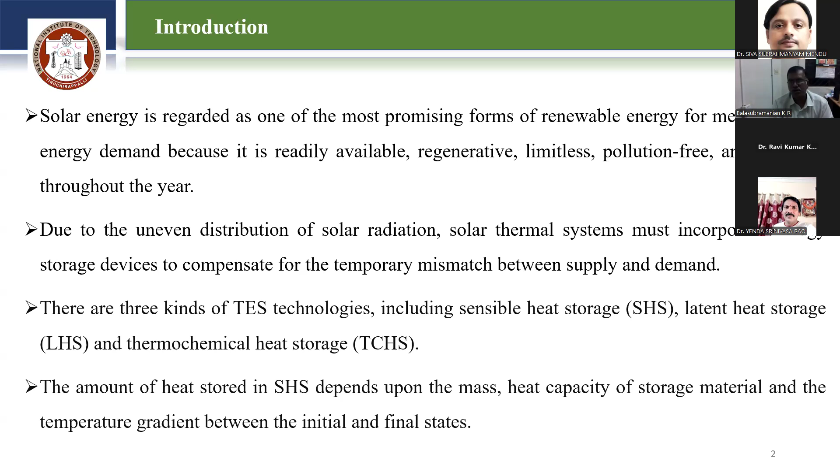So the thing that is very important to consider here is the amount of heat stored. That depends upon factors like the mass and the heat capacity of the storage material, and the temperature difference between the initial and final state. So these things will decide how much heat is being stored. So here we can see the three different types of heat storage.

So in the first figure, we can see the sensible heat storage, where molten salt, sand, rock, concrete, these types of materials are used for storing the heat, working in the sensible heat region.

Then the second one is the latent heat, and here there is a phase change that occurs. That is, solid to liquid phase change occurs. So that is the latent heat storage. And here the PCM materials are being used like salts, metals, the organics. And there are some advantages and some disadvantages among these three that we will discuss in detail.

And the third one is the thermochemical. And here we can see the heat losses are very less in the thermochemical. And also, if we see the energy storage density, it will be very minimal in the sensible heat storage, in between in the latent heat, and more in the thermochemical.

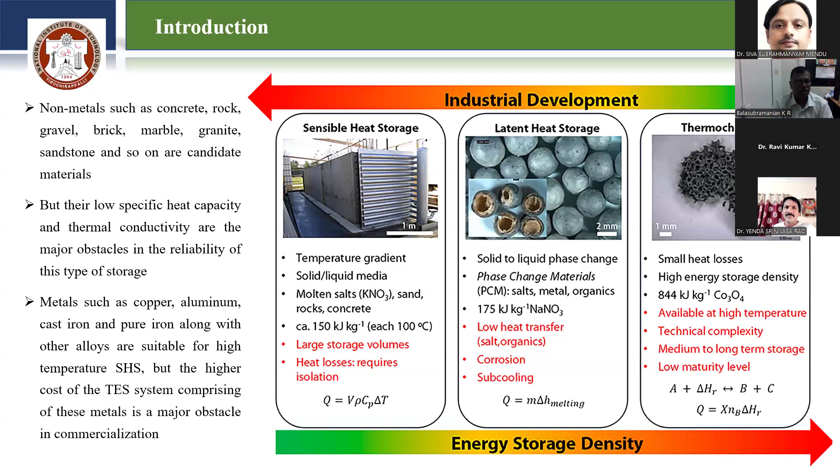And the metals like copper, aluminum, cast iron, pure iron, along with other alloys are suitable for high temperature storage. But cost-wise, it is very high. So that is another problem in making this commercial.

And the third method, that is the chemical thermal energy storage. In this, the energy stored and released is due to the reversible reaction. So here, the chemical methods of TES are classified as sorption storage and thermochemical energy storage. It comprises solid to gas, liquid to gas, or gas phase systems.

So in this chemical TES, the energy is stored in thermochemical heat storage as a result of a dissociation reaction, which is then recovered in a chemically reversible reaction. So here the thermal cycle consists of charging, storing, and discharging.

And here the amount of heat that is stored in thermochemical energy storage involving the solid-gas phase depends upon the pressure of the gas. And it also depends upon the operating temperature and also the reaction enthalpy.

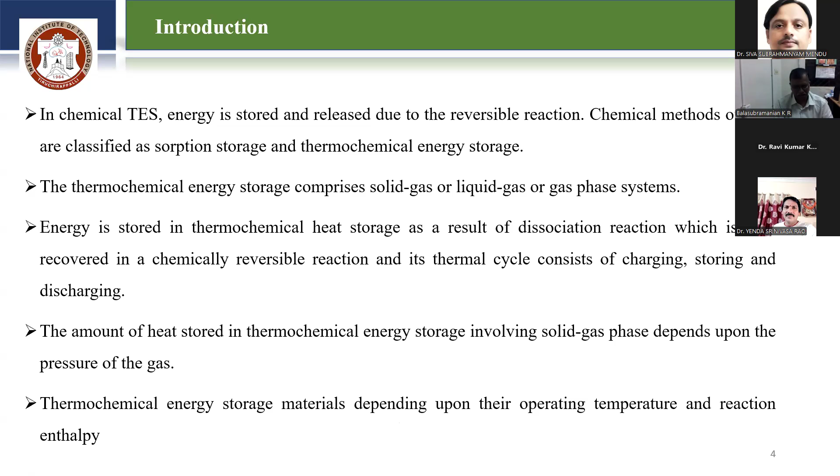So typically the storage density of the latent heat storage medium is higher compared with the sensible heat storage medium, due to the high enthalpy change which occurs during the phase transition. However, the thermochemical energy storage has the highest storage density compared with the other two modes, that is, the latent heat storage as well as the sensible heat storage medium.

But the thermochemical energy storage materials are only in the development phase, and no such system is commercially available. So that is one major thing, but a lot of research is going on. And the commercial viability of the latent heat storage is limited due to the material characteristics, and hence it is in the development phase.

However, this sensible heat storage is commercialized in a large manner. And when we discuss the durability, the sensible heat material lasts almost around 20 years, whereas the latent heat storage material is around 1/4 of that lifetime. And when we compare the thermochemical energy storage, it is about 1/10 of the lifetime of the sensible heat storage material. So the lifetime is very less for the thermochemical energy storage, and similarly for the LHS materials.

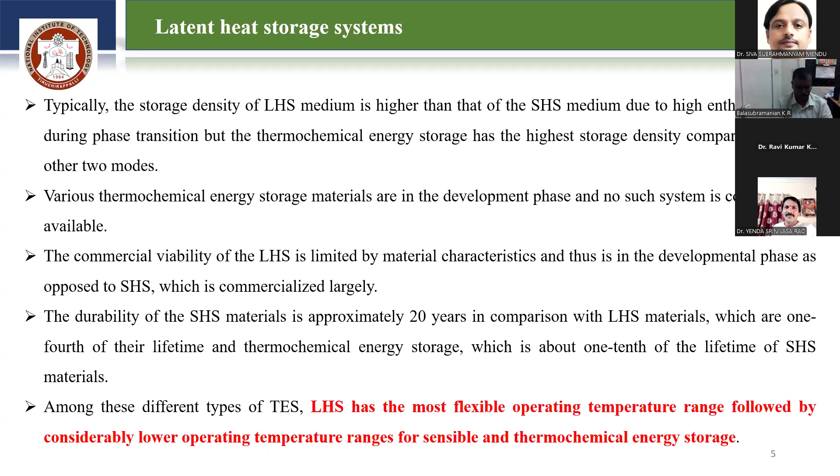So here we can see the classification of the thermal energy storage system. Here we can classify into two basic classifications. One is the physical storage, the other one is the chemical form storage. And the physical storage, once again, can be classified as sensible heat storage and latent heat storage. And sensible heat can be stored in the solid or the liquid form.

In the solid, the candidates are non-metals like rocks, and even metals and alloys are used. And under liquid, the molten salts, water, which is one of the best examples, and thermal oils. So these are all the liquid-based SHS storage mediums. And in LHS, PCMs are majorly used for conversion of solid to gas, solid to liquid, liquid to gas, and

solid to solid. So here we can see the different types of PCMs, like organic PCMs, inorganic PCMs, and eutectic PCMs. The examples of organic PCMs are paraffins, fatty acids, esters, alcohols. So these are all what people are using. And the inorganic PCMs are the salts, salt hydrates, metallic compounds, metal alloys. And the binary, that is the eutectic PCMs.

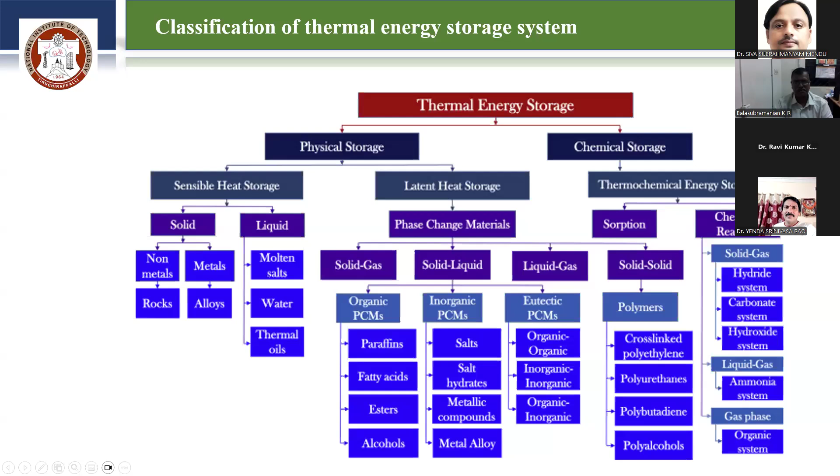So here the heat of phase transition in the solid to solid PCMs is relatively less when we compare to the solid-liquid PCM. So the majority of the PCMs considered for TES are solid to liquid phase transition materials, right? And these are sorted on the basis of the nature of materials, whether organic, inorganic, or eutectic.

And these PCMs are further categorized on the basis of their phase transition temperature as low, medium or intermediate, and high. In the case of low, the melting points will be less than 220 degrees centigrade. In the intermediate, it ranges between 220 to 420 degrees centigrade. And in the high temperature range, it is more than 420 degrees centigrade.

And the organic PCMs, like the paraffin wax, alkanes, esters, fatty acids, alcohols, and even other components, including ketones, amides, sugars, and oleochemical carbonates. So these are all being used. These are all the organic PCMs.

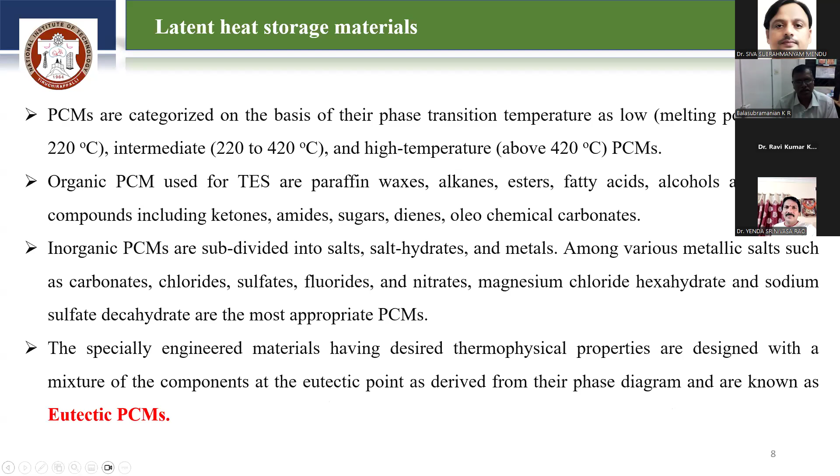The specially engineered materials having desired thermophysical properties are designed with a mixture of components at the eutectic point, which are derived from the phase diagram, and are known as eutectic PCMs, like organic, inorganic. So the eutectic PCMs may consist of a eutectic mixture of multiple materials, like, as I mentioned, mixtures of organic components and inorganic components.

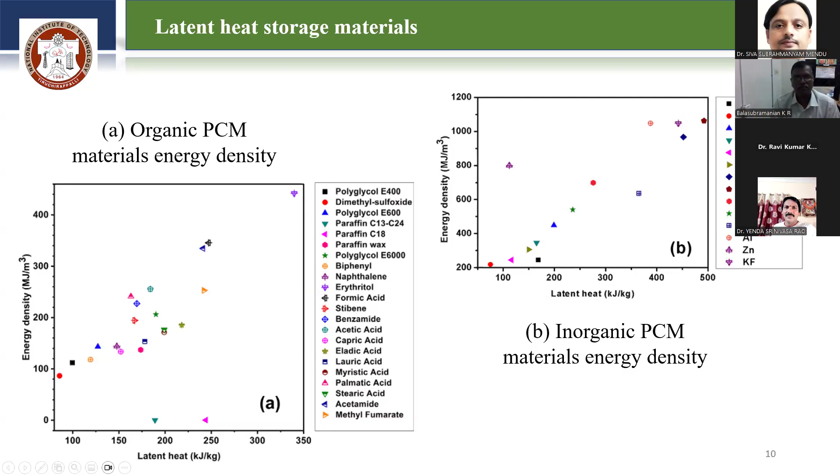Here we can see some advantages and disadvantages of the organic PCM. The advantages: it will freeze without much supercooling or subcooling. That is one major advantage, and it can be incorporated directly. The thermal performance is better, and it is compatible with conventional materials of construction. There is no segregation, it is chemically stable, with high heat of fusion. It is also safe and non-reactive, which is very important, and it is recyclable.

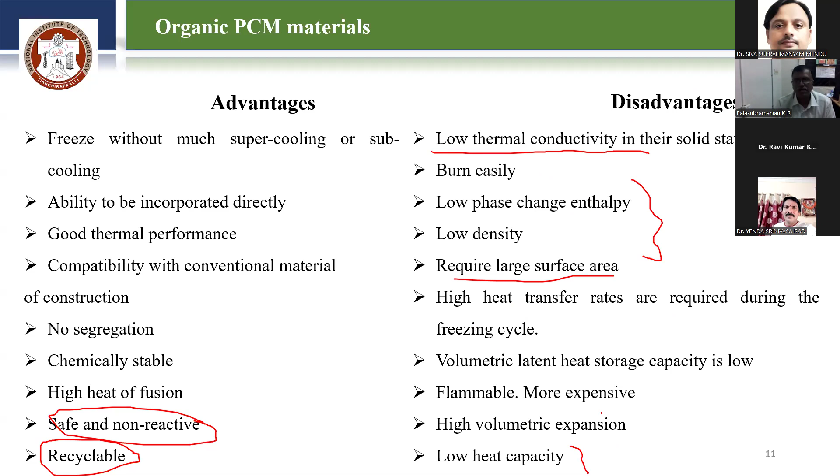Now some disadvantages. The thermal conductivity is very low, and sometimes it will burn easily. The phase change enthalpy and density are low, it needs a large surface area, and high heat transfer rates are required during the freezing cycle. It also has low heat capacity. These are some of the disadvantages of the organic PCM.

Now coming to the inorganic PCM, it possesses high thermal conductivity, large heat storage capacity and lower volumetric expansion, which means it occupies less space, and high heat of fusion per unit volume. It is not that costly compared with other PCM materials. It is also recyclable, and the phase change enthalpy is higher.

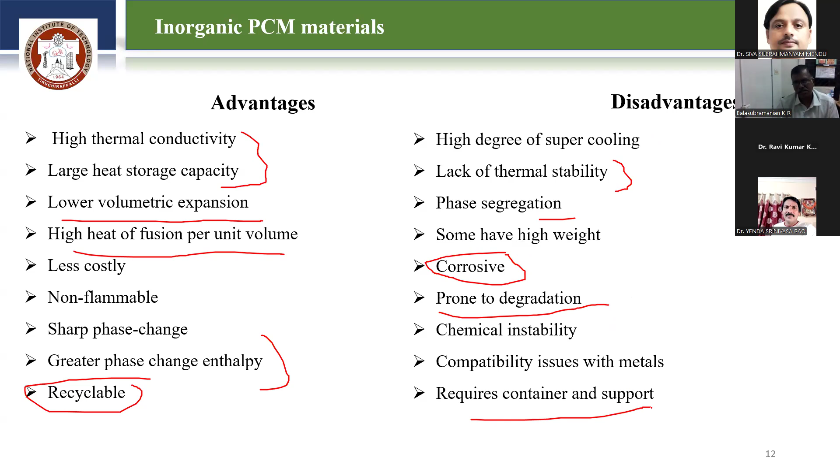The disadvantages of inorganic PCM: it needs a high degree of supercooling, and thermal stability is another big problem. Phase segregation will happen here. Another important thing is corrosiveness. It is also prone to degradation and chemically unstable. It needs a container as well as support. These are the disadvantages of the inorganic PCM.

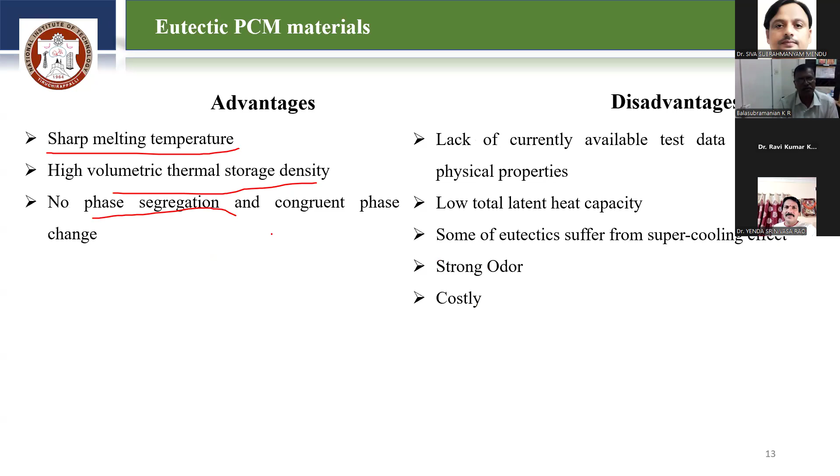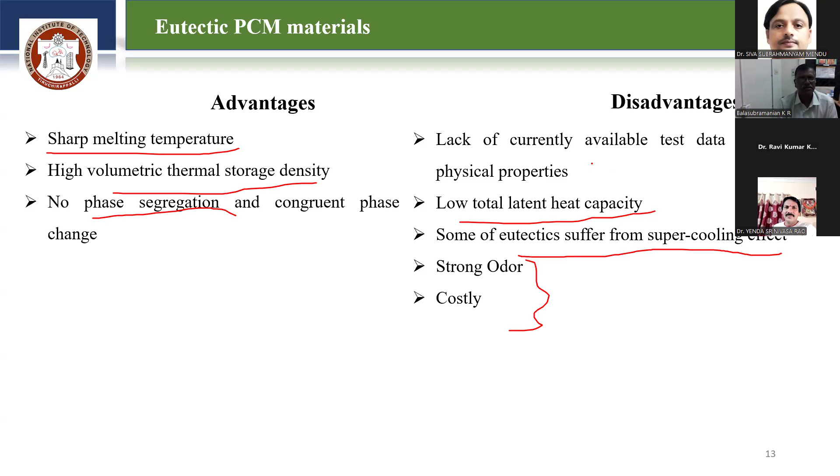Now coming to the eutectic PCM, it has a sharp melting temperature and high volumetric thermal storage density, there won't be any phase segregation, and it has congruent phase change. Some disadvantages: low total heat capacity. Cost-wise, it is very high, some eutectics need a supercooling effect, and test data about the thermophysical properties of these materials is not completely available.

So far we have discussed the different heat storage materials, thermal storage materials. Now let us discuss the thermal conductivity enhancement techniques in phase change materials. Researchers are adopting different methodologies in order to increase the energy storage.

So among that, there are few enhancement techniques available, which we are going to discuss now. One is the fin-based, that is the extended surfaces, then encapsulation of the PCM, addition of nanoparticles in the PCM, then metallic foam. And when we come to the addition of nanoparticles: carbon nanotubes, graphene nanoparticles, silver nanoparticles. So these are all being attempted. And in the case of metallic foam, nickel, copper, graphite foams are being tested.

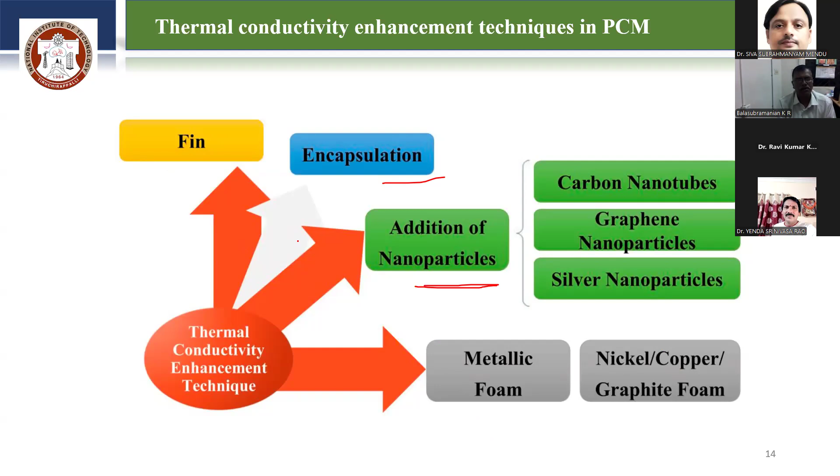So these are all the different thermal conductivity enhancement techniques. Some researchers are using 2 or 3 techniques combinedly to improve the efficiency of the system. So here we can see the different techniques: the addition of nanoparticles like carbon nanotubes, graphene nanoparticles, silver nanoparticles, the metallic foam, nickel foam, copper foam, graphite foam, even the encapsulation. And other materials like hexagonal boron nitride, spongy graphene. So these are all being used.

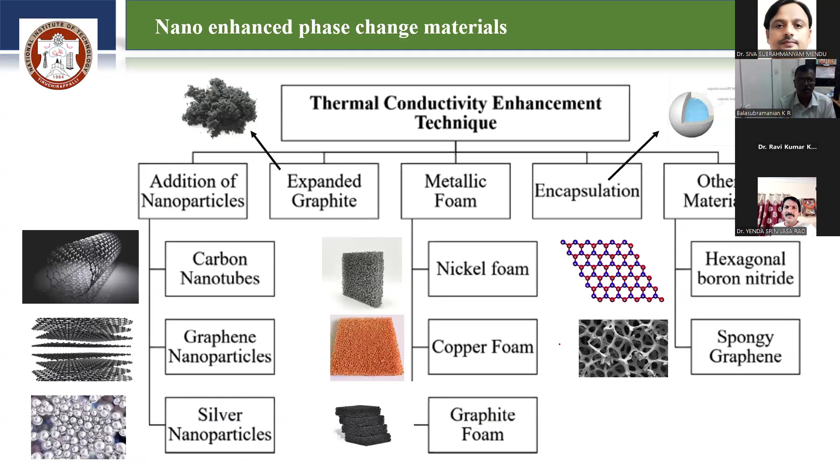Now coming to the thermal management of the lithium ion battery cells. Nowadays, even the automotive industry is moving towards the electric vehicle, in order to reduce the pollution and also to reduce the consumption of fossil fuels like diesel, petrol. The industry is moving towards the e-vehicle. The major problem in the e-vehicle is the battery. So the battery thermal management system is very, very important.

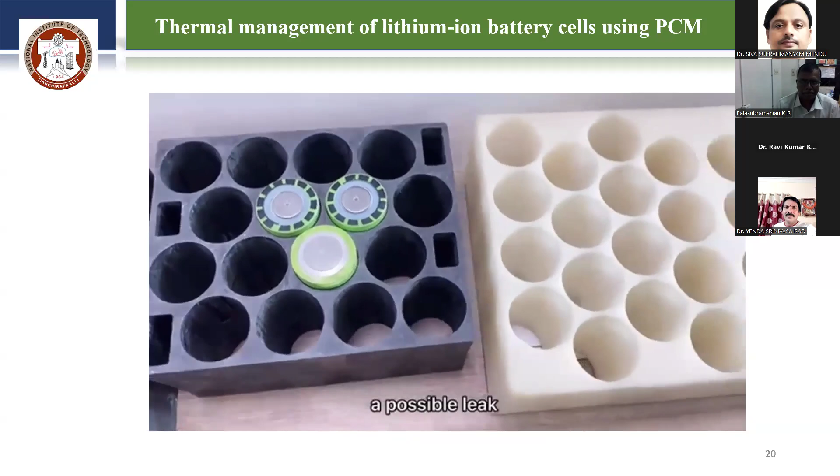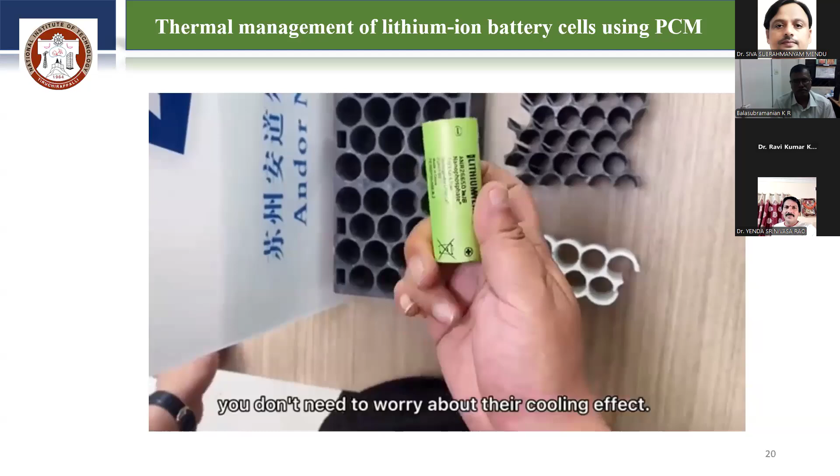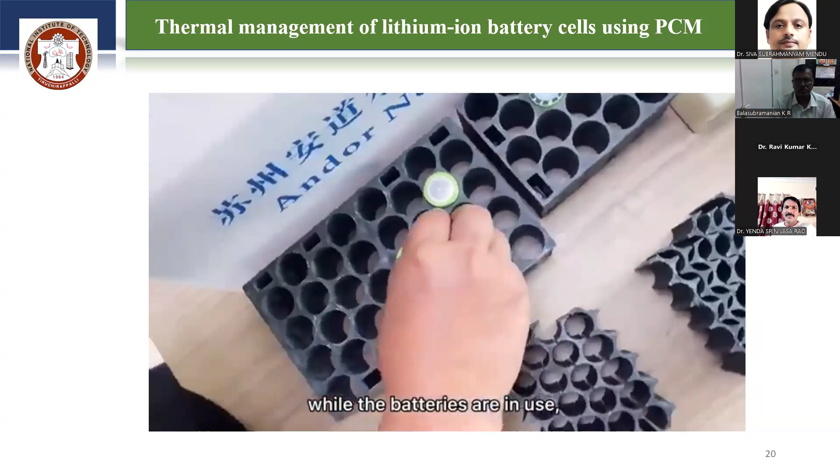For the battery pack usually come with something disturbing. Batteries melt with a possible leak when working under high temperatures. Other products based on PCM and graphite are hard and far from pressure resistant, leading to short circuits with favorable electrical conductivity, which is a fatal flaw. We are glad to introduce our products in detail for you. Through injection process, these soft materials can be easily made into all kinds of shapes to fit any type of batteries. We also specially designed a kind of holder for large battery packs with convenient assembly no matter how large they are. There are two types of products we developed. The white one without graphite and the other one with graphite in it, which conducts heat better. Since graphite is electrically conductive, measures were taken to make the products insulated. Besides, you don't need to worry about their cooling effect. Exposed at an ambient temperature of 85 Celsius degree for 4 hours, our PCM reached 59 Celsius degree, which proves they can control the temperature well while the batteries are in use, ensuring a longer life and a higher security. Our products have passed partial testing of UN 38.3 safety to be concluded. With quantifiable injection molding process, our PCM are able to extend battery life by 40%, safer and difficult to self-combust. All these add up to the biggest advantage of PCM.

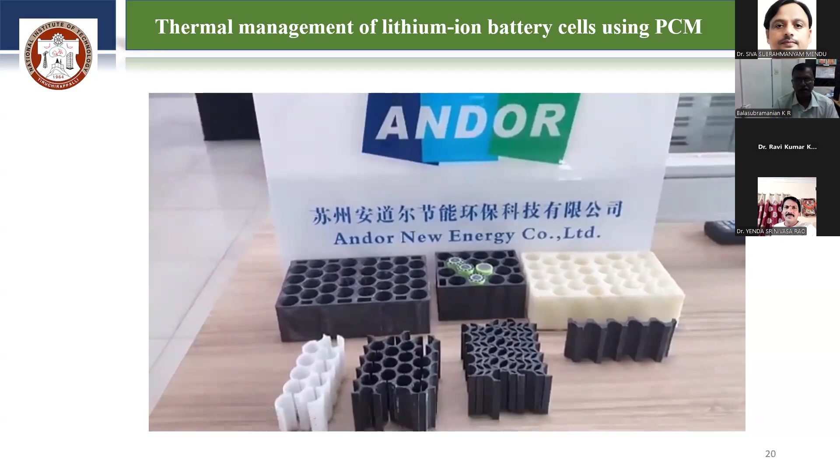So these are the advantages of PCM. So this will effectively maintain the battery temperature.

So passive thermal management of the photovoltaic cell using the PCM also helps in improving the overall efficiency of the system. We know that the photovoltaic system will work effectively at a lower operating temperature. If the temperature rises, the performance of the PV module will go down, right?

And incorporating the PV and the PCM is a novel technology, a PV module and PCM coupled in a single module for the thermal management of silicon-based PV cells, which ultimately improves the reliability of the system.

So here, the PCM is placed in channels under the cells, and during the day, as the temperature increases in the cell, the PCM will capture the heat and it will melt. Then what happens during the night? It transfers the heat to the environment and turns into solid state. But the major problem is the cost of the raw materials.

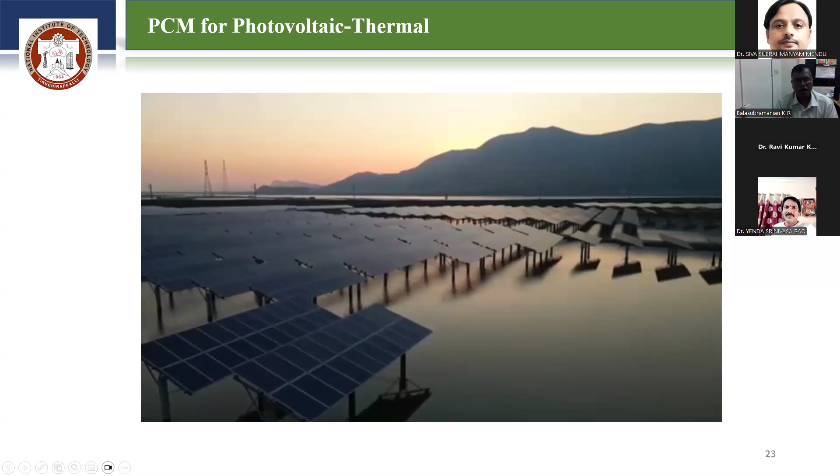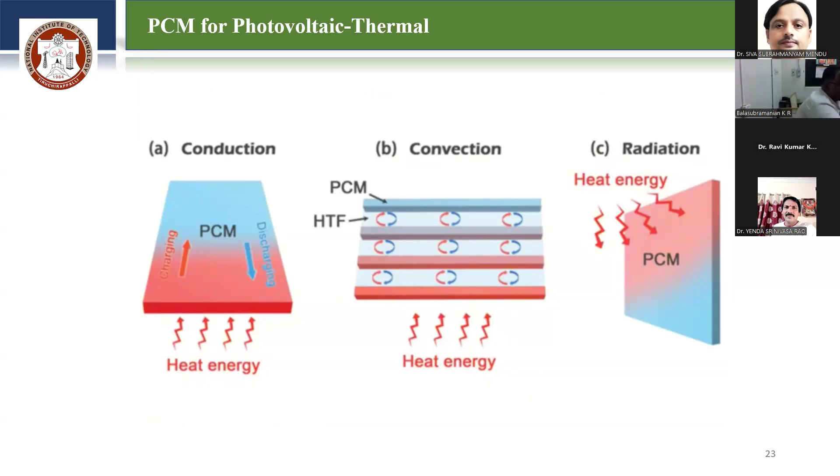So here we can see another: phase change materials cooling is a distinct form of passive conductive cooling. PCMs are substances capable of retaining thermal energy, allowing temperature stabilization. These absorb or release significant quantities of so-called latent heat when they experience a change in their physical state, such as during the melting and freezing cycle. PCMs are listed as organic oil, inorganic salt hydrates, and eutectics. The melting temperature and latent heat are the two elements for the identification of the appropriate PCM.

While this cannot be considered passive cooling in the strict sense, extra effort is not required, and heat is dissipated more conductively and has the effect of retaining the same temperature. As a matter of fact, PCM integrated with the PV module would become a better alternative due to its important properties for daytime heat absorption and nighttime release, such as high latent heat, high absorbing capacity before melting or solidification, constant temperature during phase transition, and slightly higher melting temperature.

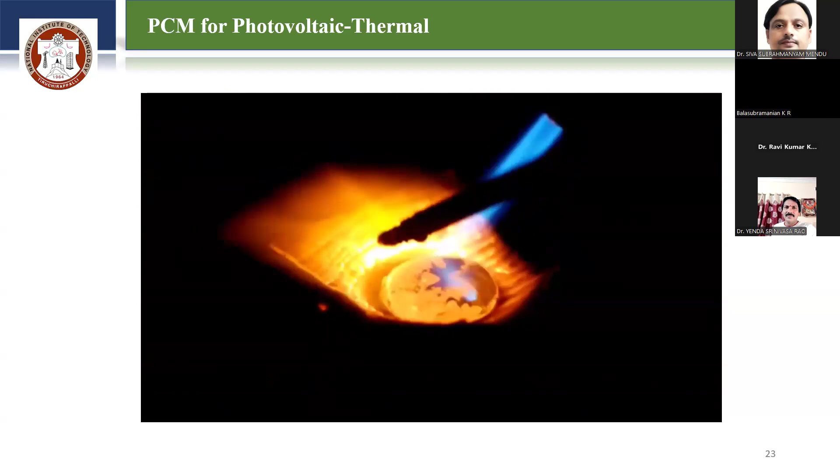Salt-based PCMs, for example, may react with metal, causing corrosion, while paraffin may react with plastics. As far as temperature is concerned, it is essential for the PCM to have a melting point above the ambient temperature at which it operates. A melting point below that will trigger the PCM to liquefy before the panel is even heated, rendering it useless. Organic PCMs, such as paraffin, are widely used for thermal storage systems.

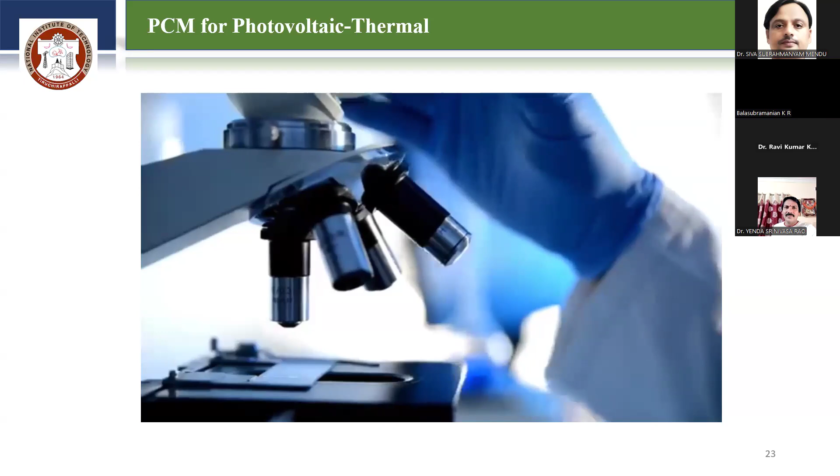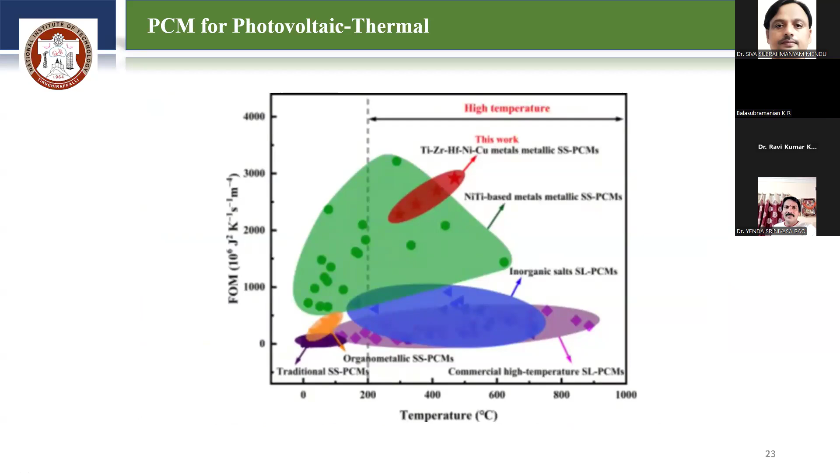However, as per various studies, the structure of organic hydrocarbons has a low thermal conductivity, which reduces the heat charging and discharging rate during the melting and solidification cycles. In contrast, inorganic PCMs have a higher phase change enthalpy, resulting in better thermal properties. A specific PCM, CaCl2·6H2O, MgCl2·6H2O eutectic, can be used for control of temperature and cooling of PV panels.

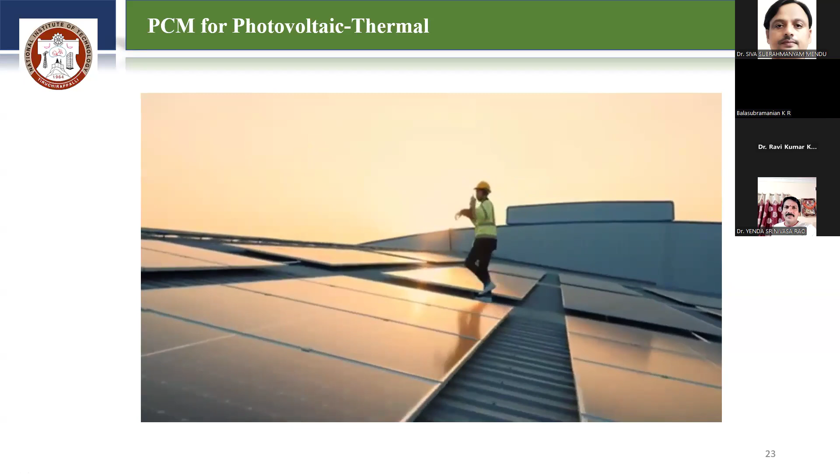So, how to select the PCM for PV panels? Nowadays we know that India is more committed to investing in PV technology and installing solar-based PV power plants. If you see this data, India's solar power installed capacity is around 92 gigawatts. And in order to achieve carbon neutrality by 2070, we need to use solar power as much as possible, and we are committed.

Already in the Paris Agreement, we have committed that emissions will be reduced by 33 to 35 percent. And it will also help in achieving the sustainable development goals of the United Nations. So our government, the Indian government, is actively focusing on the installation of PV-based power plants. And the major thing in this is the maintenance, and maintaining the temperature at an operating level.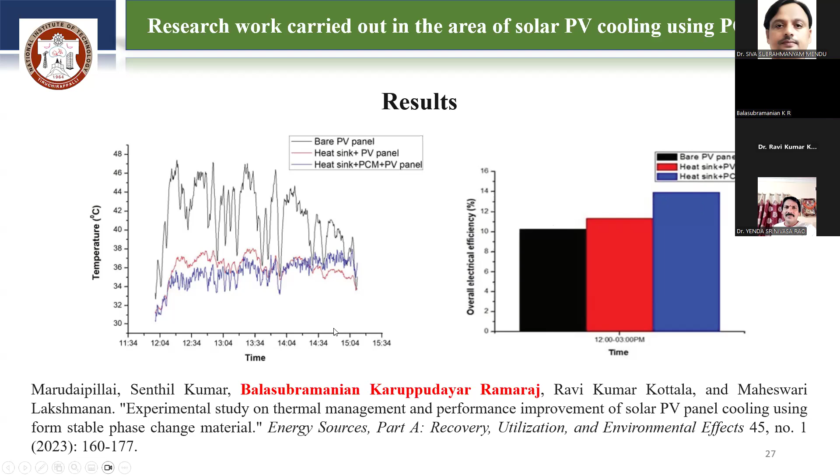So from the experimentation, these are the findings. The temperature difference between the bare PV panel and the panel plus heat sink plus PCM combination exhibits a high temperature difference, around 11.35 degrees centigrade. Due to the reduction of surface temperature of the PV panel, the overall electrical efficiency is enhanced. Here we used the aluminum heat sink, which has an improvement of 1.072%, whereas the combined heat sink with the proposed composite PCM further improved it up to 3.667%.

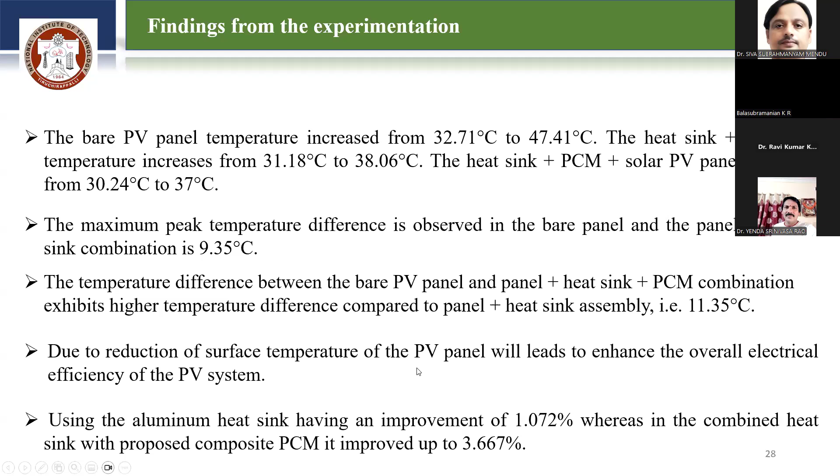The next application is on solar stills. So we know the working principle of the solar still. Here there will be a top cover, and in the basin the raw water will be filled, and in the bottom black paint will be coated.

Once the solar radiation is incident on the water through the transparent cover, the water will be evaporated and it will get deposited on the transparent cover and it will get condensed. The water droplets will form, and if more water droplets form, it comes through this top cover as it is inclined. Due to gravity, it will come and it will be collected.

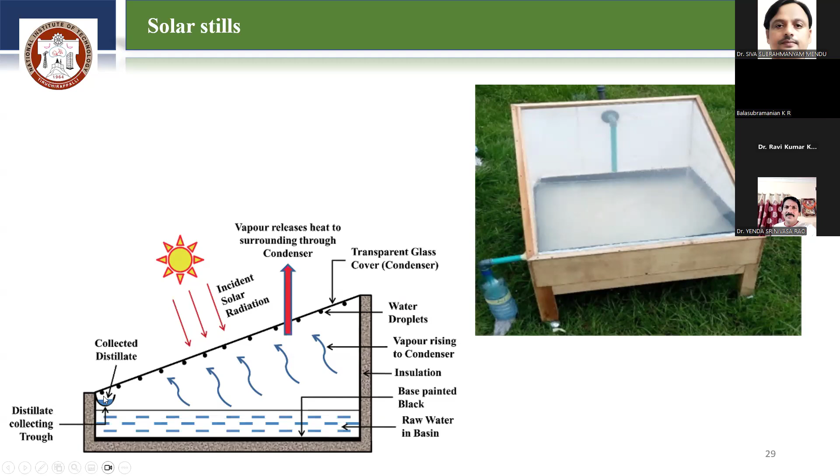So in order to improve the efficiency of solar stills, PCMs are being used. That will increase the generation of the water, more generation of water.

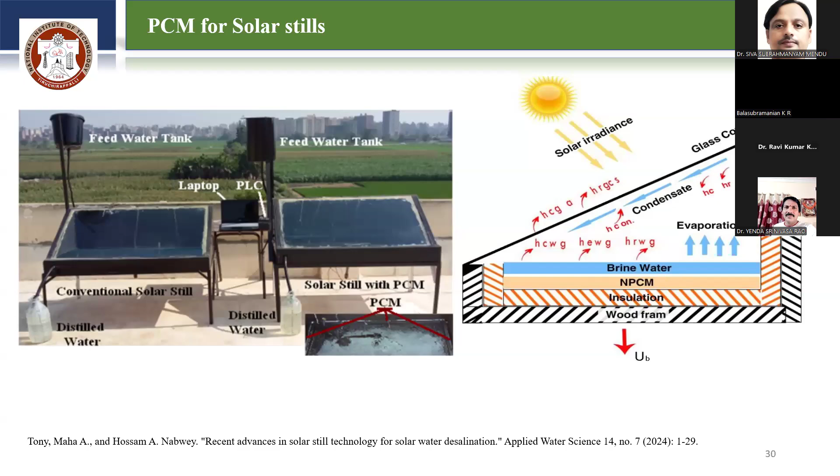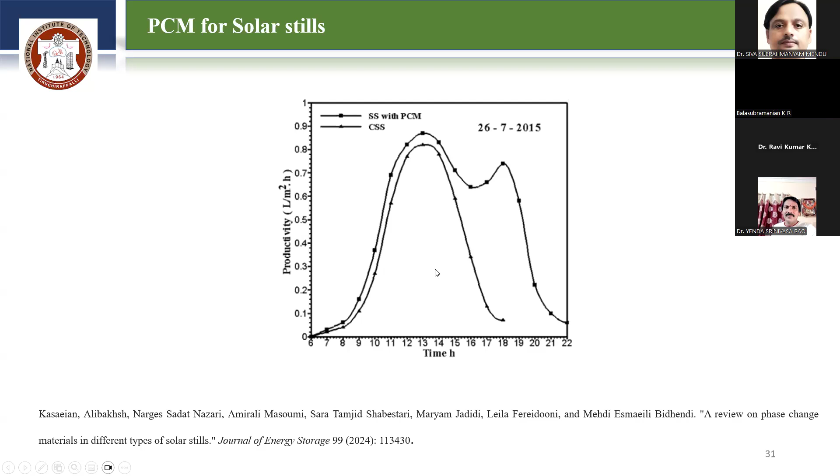Once again, we can see here, after 3 p.m., there is an increment in the productivity up to 6, 7, 8. Then it decreases. So the additional increment in the productivity can be obtained with the use of the PCM.

Next one is the use of PCM in the cold storage systems. There are a wide range of applications such as air conditioning, free cooling of buildings, food storage, medical, cold packing. In these areas, PCMs are used for maintaining the temperature. That is another important thing.

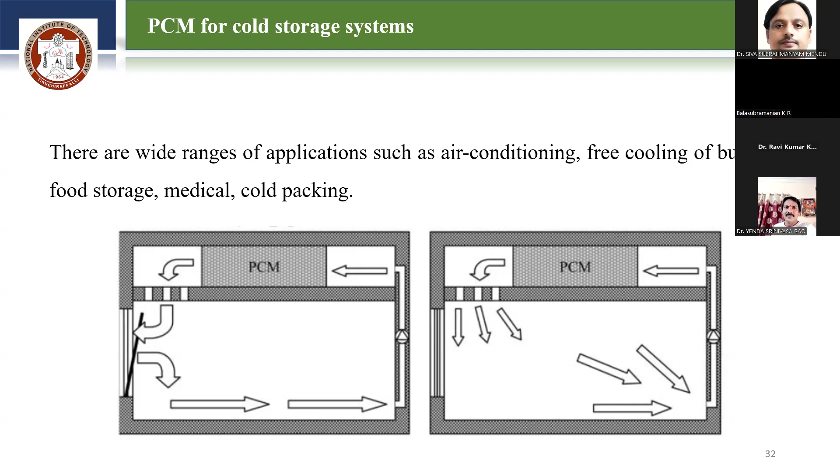So in the cold storage applications for storing the food products, or in the medical applications for storage of the blood samples, these PCMs are majorly used. Even in the refrigerated vehicles, a large amount of fuel is used for providing the cooling inside the vehicles.

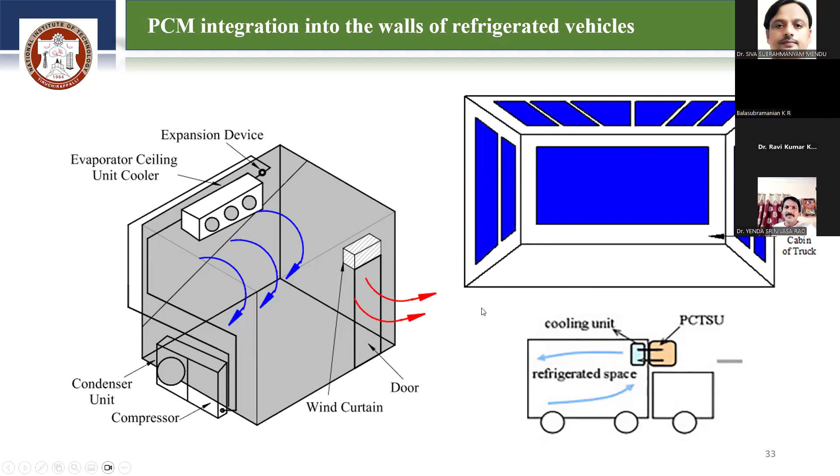So in those areas, the PCM material can be fixed. That will maintain the temperature for a longer period, and also PCM pads can be used in the refrigerated vehicles. That's how the use of the fuels can be reduced drastically.

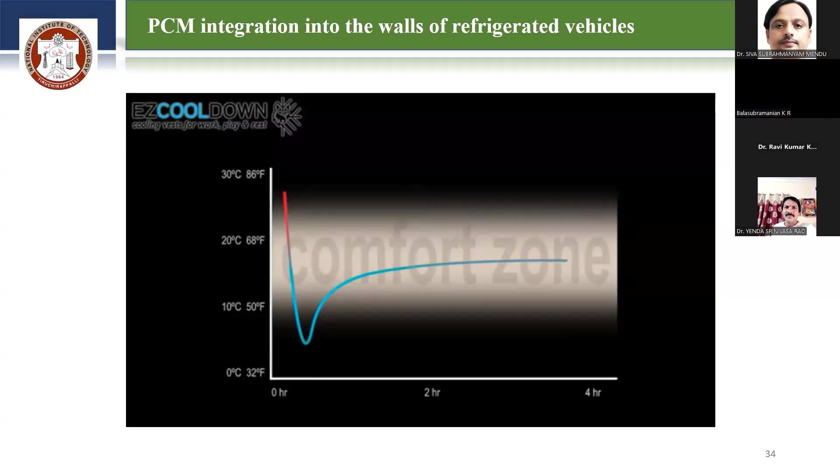PCM, or phase change material, is capable of quickly storing large amounts of cooling capacity and releasing it over a longer period of time. When PCM is activated and has stored its maximum amount of energy, it turns solid. When it releases its cooling energy, it becomes liquid again. EZCooldown PCM packs can be reactivated over and over again by simply placing them in a fridge or freezer.

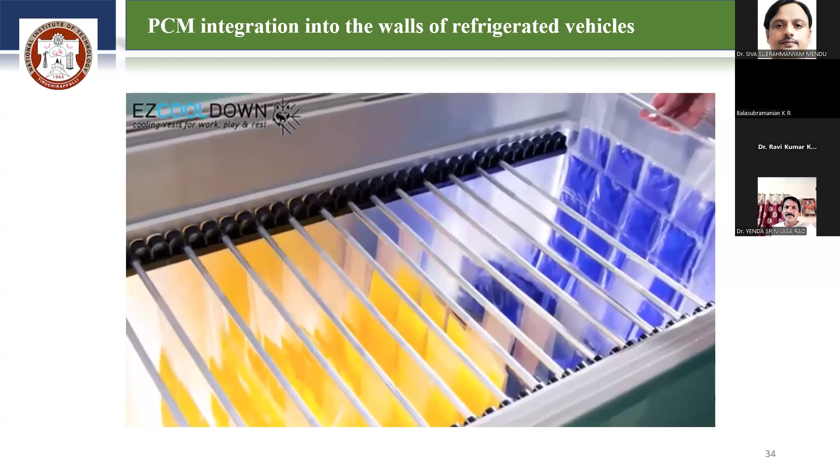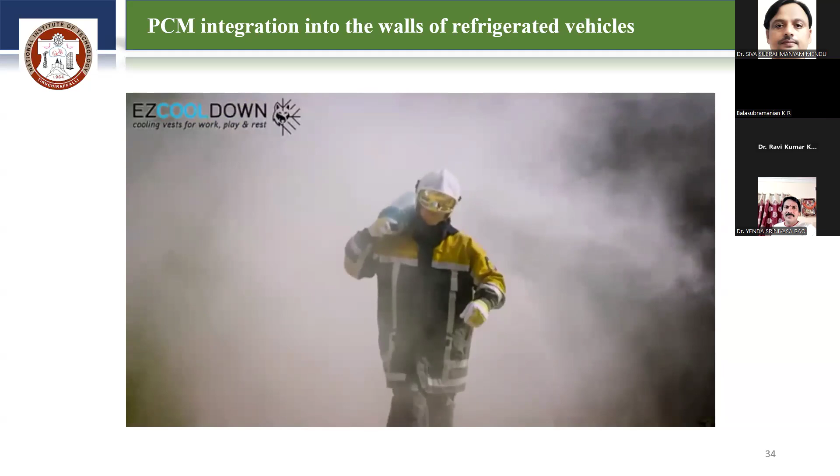Applied in a vest, PCM can help you maintain a safe body temperature and prevent overheating and heat stress. PCM cooling vests and other apparel can be worn under clothing and don't need airflow to function like evaporation vests do. PCM vests are available in different versions, suitable for virtually any situation or task. Next to different temperatures, we offer PCM packs in 2 different configurations: thin and flexible 8-cell packs, or thicker and longer-lasting 4-cell packs.

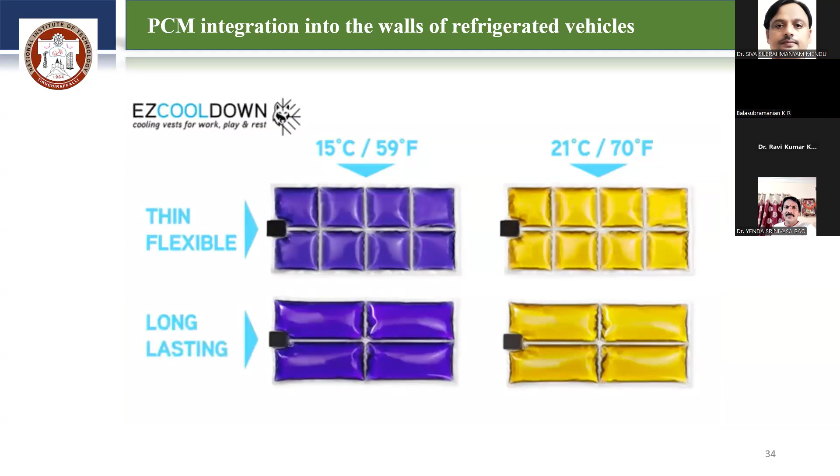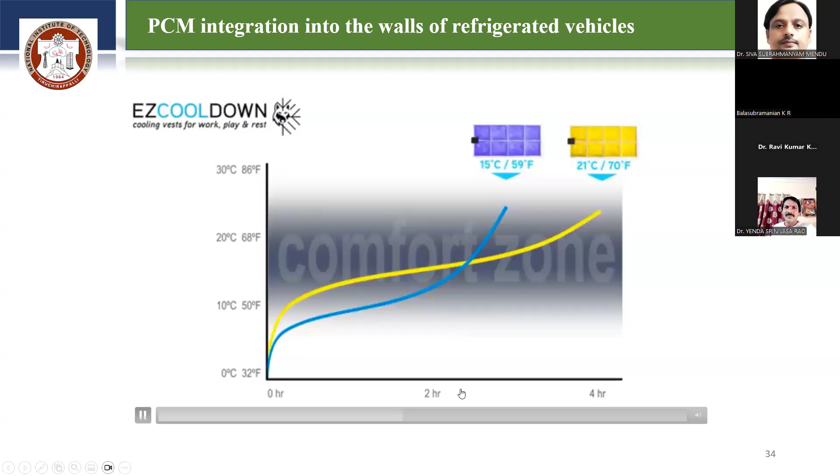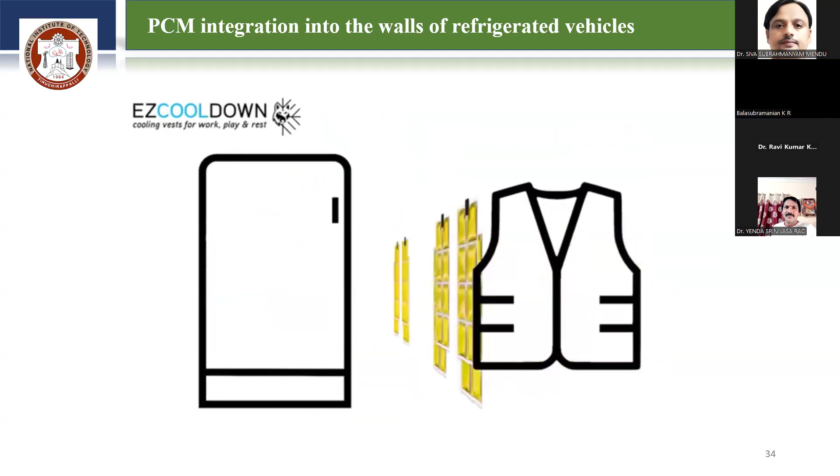Our PCM cooling vests will keep you cool for up to 4 hours. The effective cooling longevity depends on various factors: which type of PCM packs you are using, what you wear over your PCM vest, the ambient temperature, and how active you are. We recommend using a second set of PCM packs with your vest. You can stay cool for the entire day by simply wearing one set while the second is activating in your fridge or freezer. Activating PCM packs is simple.

Place the packs in the fridge for an hour or in the freezer for 30 minutes. Be sure to place the packs in a flat position and not stacked on top of each other, as this will increase the activation time. It's also possible to activate PCM packs in cold water. The lower the water's temperature, the shorter it will take to reach maximum activation. The packs are activated when the PCM has turned completely solid.

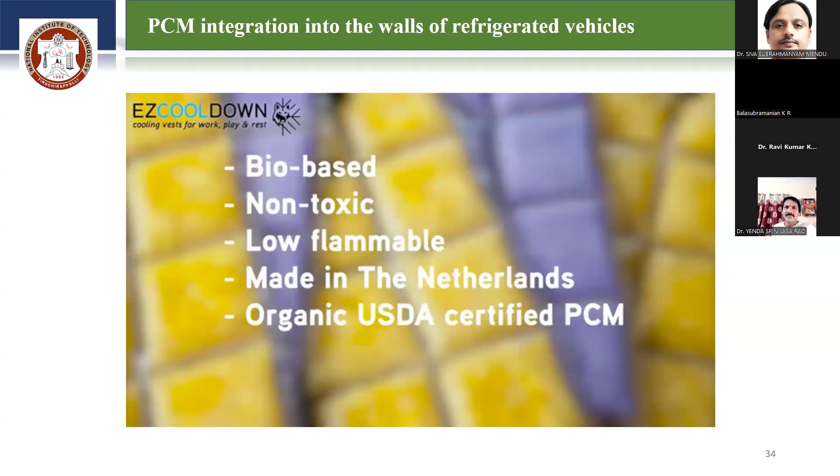Activated PCM packs will stay cool and ready to use for up to 12 hours when activated in the freezer and stored in a small cooler. The PCM used in EZCOOLDOWN apparel is bio-based, non-toxic, and significantly less flammable compared to petrochemical PCM.

And even the research is done by installing the PCM at different locations in the refrigeration system. So here we can see the PCM that is placed in different locations. The first figure, you can see it is located after the compressor, before the condenser. Then the next figure, you can see it is placed after the condenser, before the evaporator. And the third one is fixed after the evaporator and before the compressor.

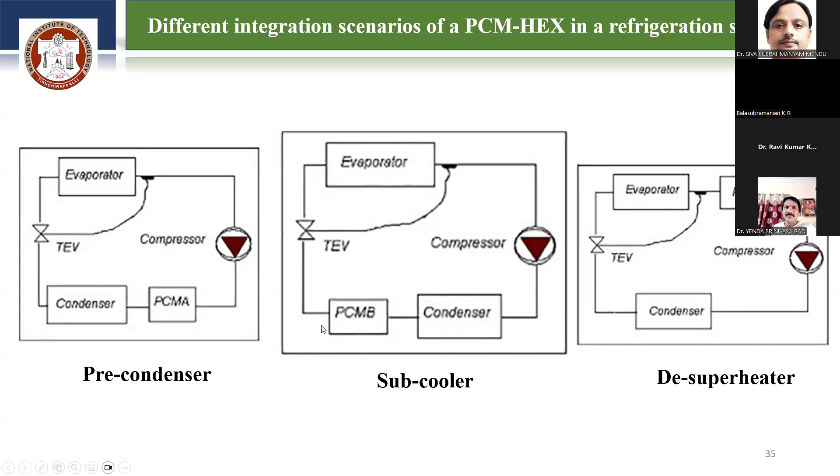So in the first condition, after the compressor, the refrigerant will be of high temperature, right? So before getting into the condenser for cooling, if it is cooled through PCM, the effective cooling will be obtained. So likewise, this PCM is being used in the refrigeration system also.

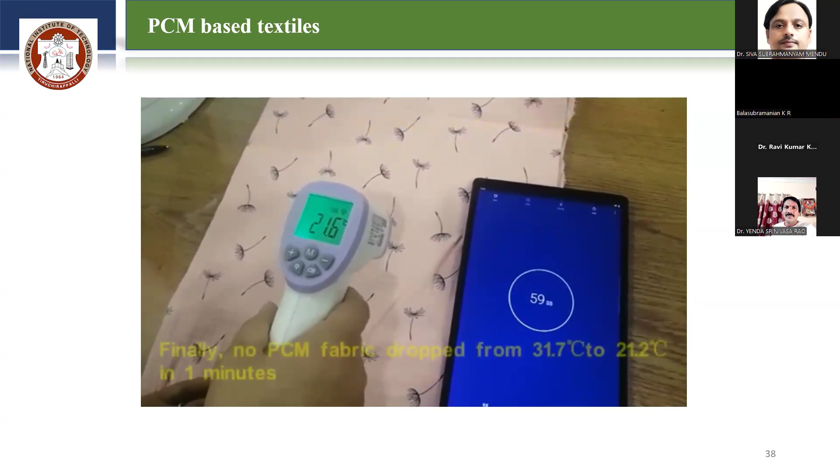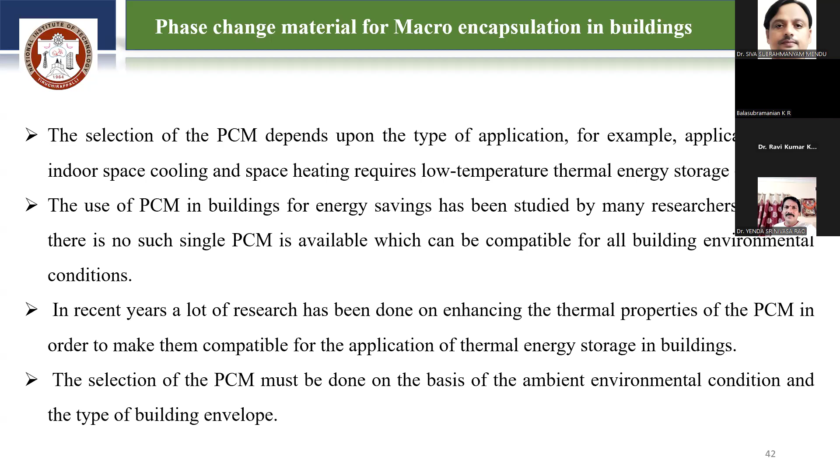So the encapsulation of the PCM will increase the heat transfer rate by increasing the surface area and in turn the thermal conductivity, right? And it also prevents the phase change material from coming in direct contact with the building material and also the surrounding environment, by which the stability of the PCM also increases, right?

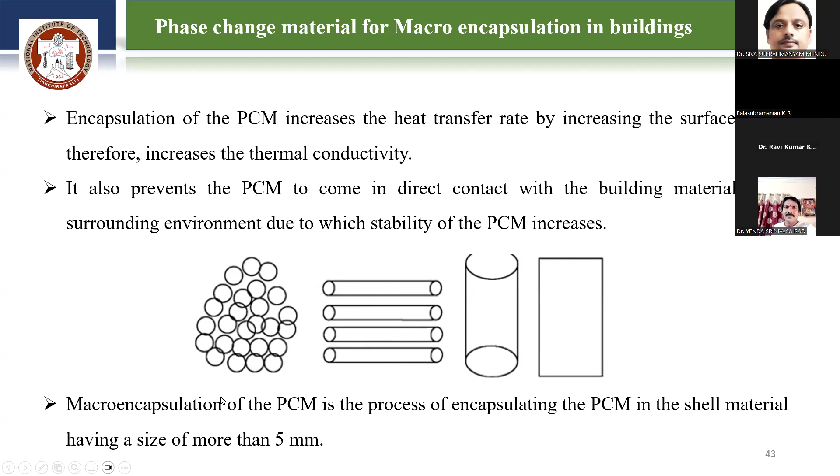So what is this macro encapsulation? This macro encapsulation of the PCM is the process of encapsulating the PCM in a shell material, right? Having a size of more than 5 mm. Okay, so that is the macro encapsulation.

So the properties of the macro encapsulated PCM: it must maintain the indoor temperature under the thermal comfort range, and also it should be helpful in shifting the peak load to the off-peak hours. And basically, it must reduce the overall energy demand, which is required for space cooling. And also, it must reduce the indoor temperature swing.

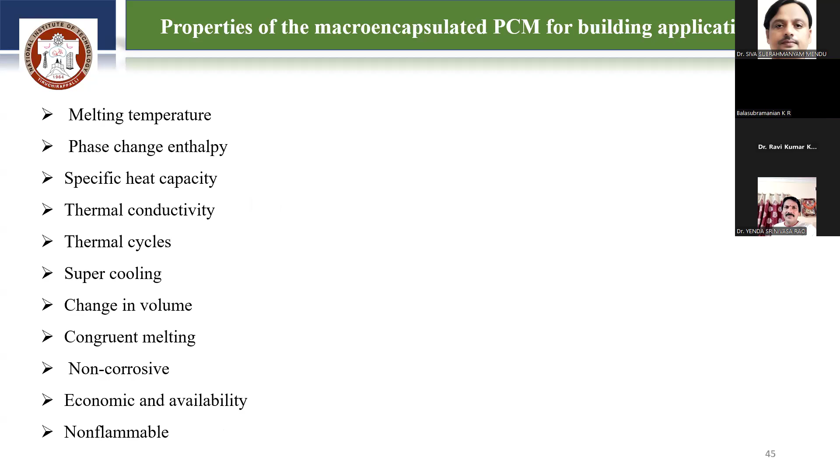And most importantly, it must be chemically and physically stable. Okay, and it should not create any harmful effects to the environment. Okay, so these are some of the properties of the macro encapsulated PCM that have to be considered. It is the melting temperature, phase change enthalpy, right? The specific heat capacity, thermal conductivity, whether it is economically viable, and it must be non-corrosive.

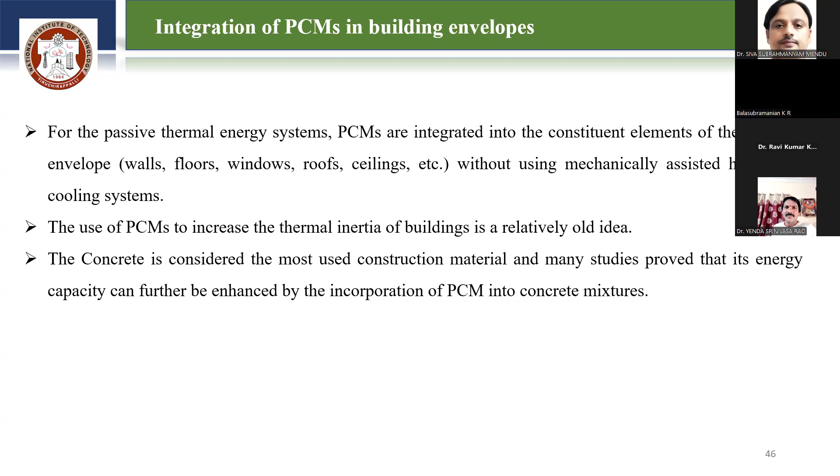Okay. So, for passive thermal energy systems, these PCMs are integrated into the constituent elements of the building envelope, like walls, floors, windows, roofs, ceilings, etc., without using mechanically assisted heating or cooling systems. So here the use of PCM is to increase the thermal inertia of the building. Okay, which is almost an old one. Now concrete is considered the most used construction material, and many studies also proved that its energy capacity can further be increased by incorporating the PCM into the concrete mixtures.

Okay, so these types of materials can be used for constructing the walls. That will reduce the transfer of heat from the atmosphere to the indoor, which provides natural cooling. Then macro PCM is also used for preparing the tiles, okay, wall tiles. So that also provides good cooling.

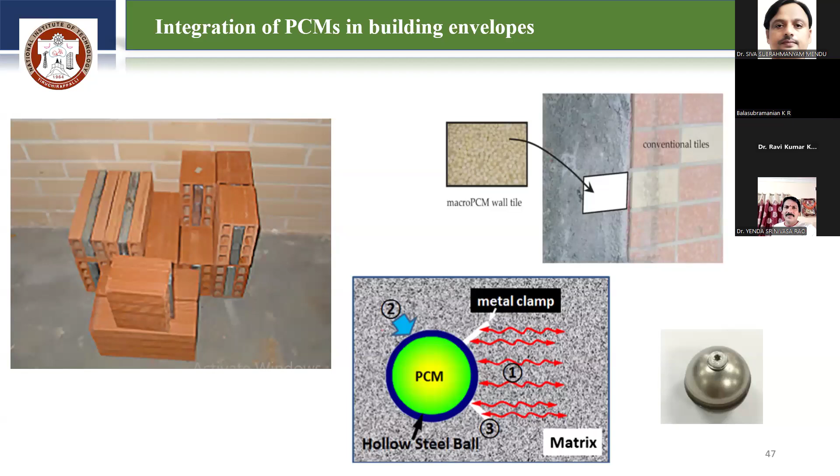Then use of the PCM with the steel balls. So here we can see the steel balls. Inside the steel balls, the PCM will be filled and it will be thoroughly fixed, right, without any gap. So when the temperature rises, the solid PCM will be converted into liquid. And if the atmospheric temperature reduces, then the PCM will liberate the heat through the metal and it will get solidified. In turn, it releases the heat to the surrounding. So it will maintain the temperature in the desired condition. So in this way also, the PCM is being used.

Now, so far we discussed how the PCM is used in different sectors, right? Now, let us discuss the characterization techniques of the PCM samples, right? So, the first work I'm going to discuss is the preparation of nano encapsulated PCM samples. Okay, so here we can see

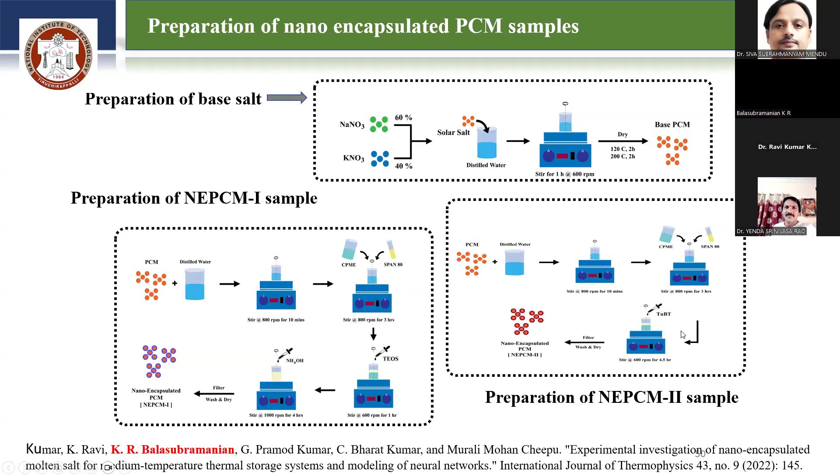Basically, the base PCM will be there, over which the coating is done. That is, the nano encapsulation is done. So that is the one method. Likewise, another nano encapsulated PCM is also obtained, similar to what we discussed. In the first one, the SiO2 based PCM is prepared. In the second case, TiO2 PCM is prepared.

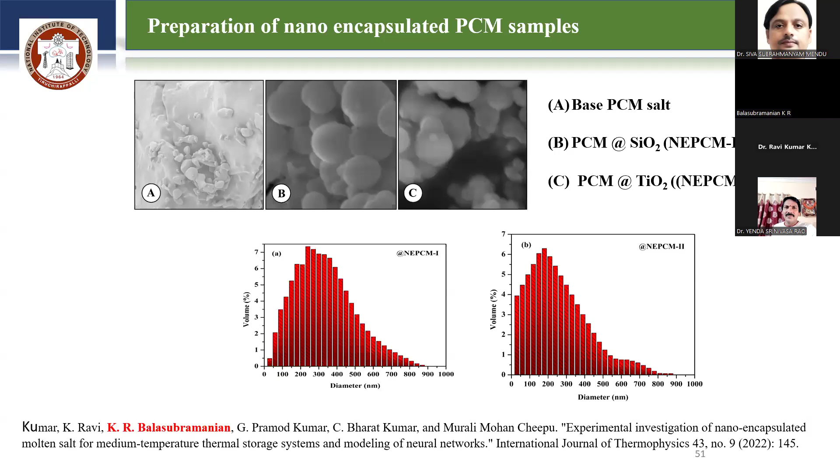Here we can see the surface structure of the base PCM salt in figure A, SiO2 based PCM in B, and TiO2 based PCM in figure C. Here it's like a flake for the base PCM salt, whereas here it is spherical in shape, which shows the formation of nano encapsulated PCM samples. And here we can find the size of the SiO2 based PCM and TiO2 based PCM, which ranges between 200 to 500 nanometers.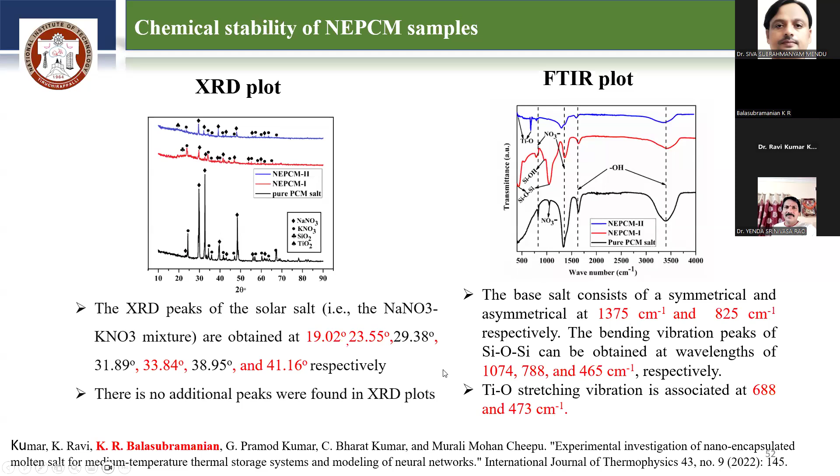There are no additional peaks in the XRD plot, and from the FTIR plot we can see the base salt shows the symmetrical and asymmetrical peaks at 1375 and 825 per centimeter respectively. The bending vibration peaks of SiO can be obtained at wave numbers of 1074 and 788 respectively. So this shows the chemical stability.

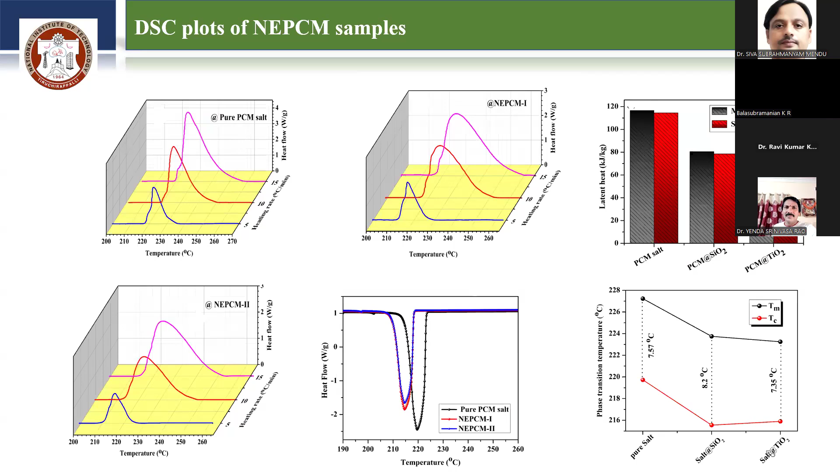In this phase transition temperature, we can see the melting point for pure salt is at 228, whereas for SiO2 it is 224, and further reduced for TiO2. So this clearly shows that these materials can be used effectively for thermal energy storage.